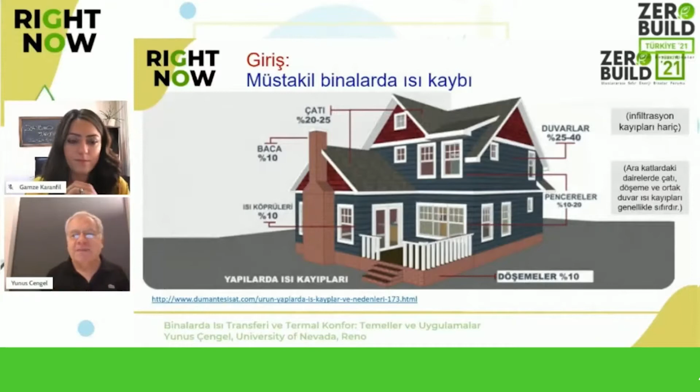There is loss of heat, and here there is no... We are trying to come up with awareness raising. There are the heat losses, for example, 10% of this. And if it is condensate, it is 99% efficient.

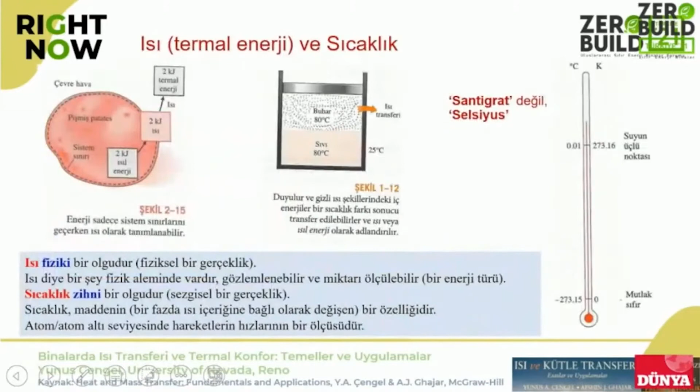And thermodynamics is a discipline itself. What is the essence of it? While you work on it, the net change in its total energy is the difference between the input and the output of energy. So the total energy that enters into the system, and we get the difference when we deduct it from the total input. This is so simple. So the energy that enters and the energy that we have as an output, and then we get the difference.

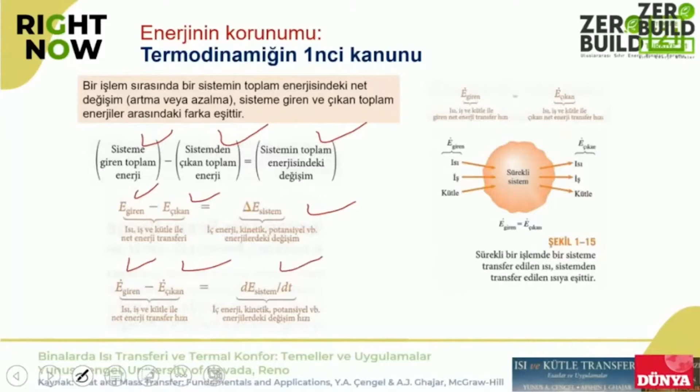So if we want to have it rapid, we use the units version, and then we call it the input and the output. It might be in the form of energy or with the mass, and then it is equal to the energy within the system, and we can see it in the scheme. Energy, of course, the simple way is thermal energy. We have energy within the building or within air; if it is too much, we feel hot. If it is enough, we feel comfortable. And there is also this energy with

some sensible energy or some latent energy. When there is this chemical reaction, there is no change in the structure of atoms. For example, there is carbon or hydrogen, and while it burns, nothing happens to atoms. For example, if something happens to an atom, and it turns, for example, into helium, then we call it nuclear energy. So usually, this is not our topic for today.

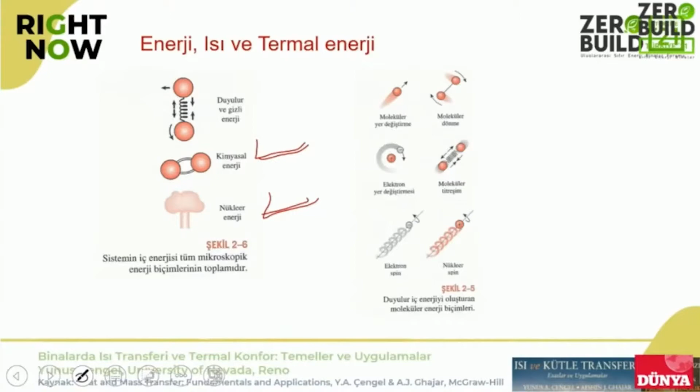The issue that we will talk about is thermal energy or heat. It's mainly about the movement of atoms or molecules. So it is the reflection of the movement. So we see an increase in heat when there's an increase in their movement. Another important point is efficiency. We want to achieve something, and then we do something in this respect. It is the productivity that we are dealing with.

For example, we want to cook pasta. That means we need to boil water. Of course, it will not boil by itself at the temperature of the kitchen. That means we need to burn something, or transform electricity into heat so that it will enter into the water and then it boils. For example, we have a heater device with 5 kilowatts, and then 3 kilowatts enter into the water and 2 kilowatts go to the kitchen. That means the efficiency is 60%. This is the efficiency.

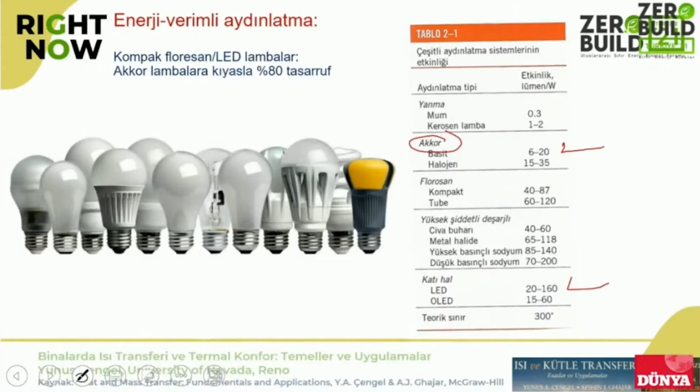We call it energy efficiency lighting. And comparing to incandescent, we can save up to 80%. So rather than paying 100, you can pay only 20 Turkish lira.

Also, let's talk about the cost efficiency. Rather than the energy amounts, if you pay attention to the amount of money that you are spending, it is economy. In fact, they are quite equal to each other.

So people usually ask which type of heating source is more efficient. I have a publication on this issue that was published 2 years ago, and I compared natural gas and also LPG. 2 years ago, 1 unit of natural gas was 1.8 TL and LPG was 108 TL, but their units were not the same. And you see their value, and what we see is 50% efficiency. That means 50% is lost.

If it is electricity, it is up to 75, but if it is induction electricity, then it is 90%. So the money spent for heating, it is 44, and LPG, it is 151. If it's electricity, it is 98, and if it is induction, then it is 90. It's 81.

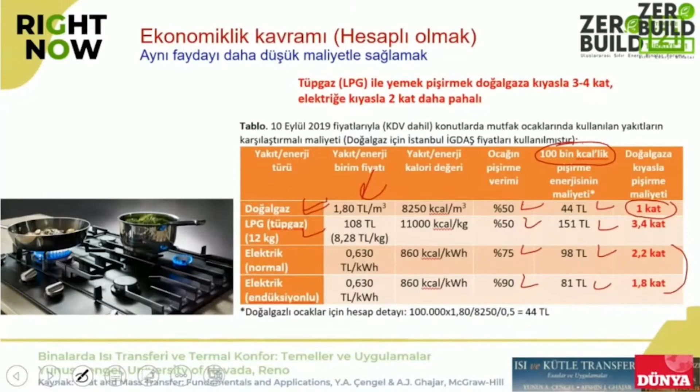So, of course, it changes according to the price, but if you have natural gas, for example, it is useful and helpful to use it. And if you use electricity, then you pay twice. Comparing natural gas and LPG, if you use a stove with induction, then you save money. So it is about economy, and you can calculate this issue easily. Sometimes simple calculation is extremely important.

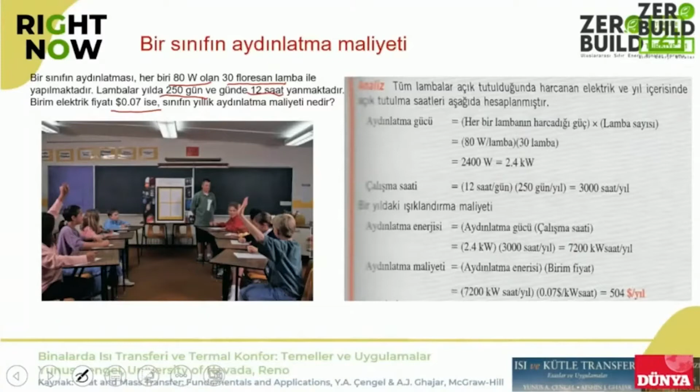For example, lighting cost. You don't need to be an engineer. You can make the calculation. It's a simple example. If in an example there are 30 bulbs and these are 80 watts, and all these lamps are fluorescent, then you can easily calculate. There are 30 and they are all 80 watts. That means when we multiply them, it is 2,400 watts. That means 2.4 kilowatts.

And given the fact that we use them for 250 days, you can simplify it, and it is 3,000 hours per year. And when we multiply 2.4 kilowatts by 3,000, then it is 7,200 kilowatt hours. It is important because we use kilowatt hour as our energy unit. When we multiply it, we get this kilowatt hour.

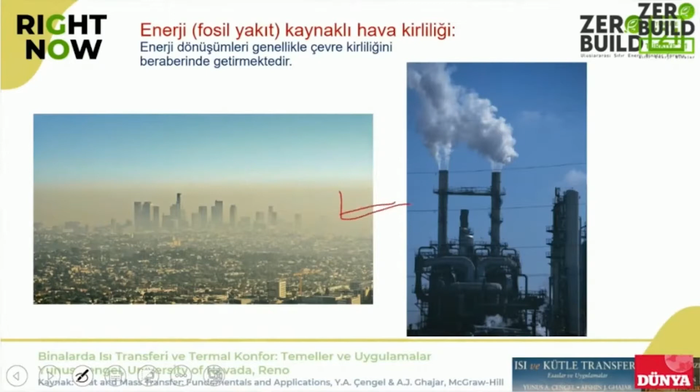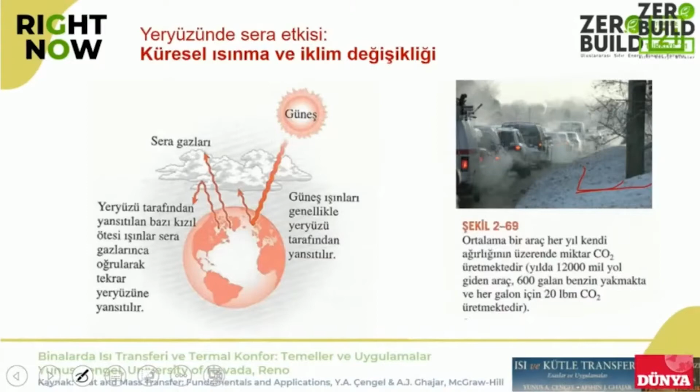As we see in this photograph, our lungs are exposed to pollution, and it is not good for our health or our economy, our budget. And it is CO2, greenhouse gases, and they form a cloud which creates a greenhouse effect. And here's interesting info: a car generates CO2 which is much more than the weight of the car itself.

Another issue is this, as you all know, specific heat, the required amount of energy to increase 1 Celsius degree. For example, if we want to cool down a Coke, what we need is the change in its energy, we just multiply it, and then we achieve this. So it is about the energy transfer from the Coke.

We need to remove this energy from the Coke, and the energy balance here for this energy transfer is the energy that enters and the energy that leaves, and then the difference. And there is no energy generation in this case, such as lighting, electric heating, or energy production. What we have here is the change in its thermal energy.

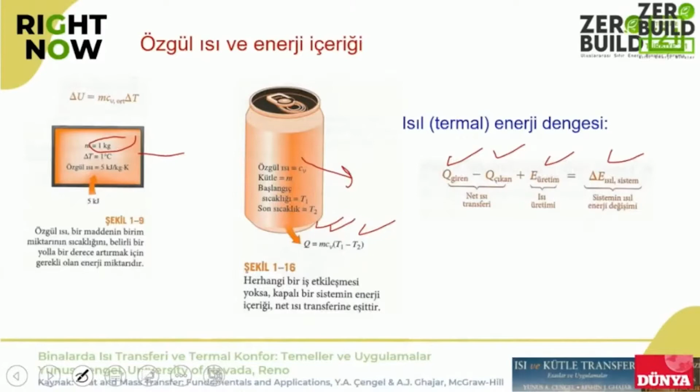This is the main formulation that we have, and this is the main equation that we have here.

As regards to the surface energy, as you know, the surface does not store energy. So the surface energy needs to be equal: the energy that enters and the energy that leaves must be equal. So let's look at a wall.

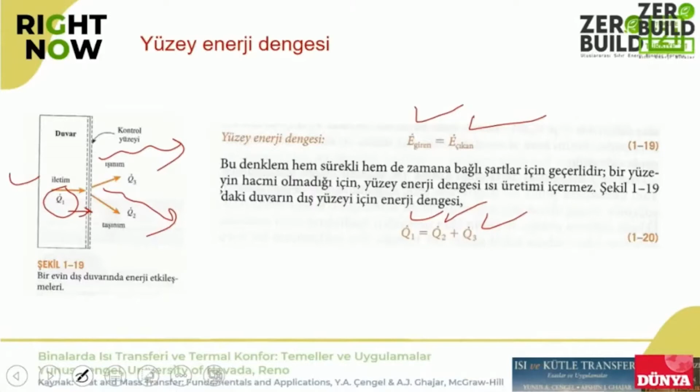For example, it is the exterior wall, let's say, and we lose energy, and then we have this Q1. We will receive it and lose it later, and then there will be 2 mechanisms. And then we see how it moves, because air carries this heat. So Q1 equals Q2 plus Q3. That is radiation. This is the energy balance that we are using.

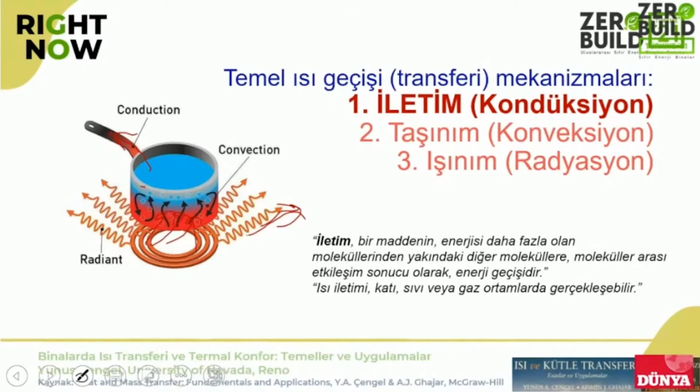In this image, as you see, the red part is radiation, even though there is no connection, there is no touch. If there is touch, then it becomes conduction. And if there is flame, since it includes air movement, then it's convection. As for conduction, if you touch this part of the plate, then you will feel this part, because sometimes they are parallel, sometimes one transforms into another.

This is the second law of thermodynamics, that is, heat moves to the part that is colder. So if the coffee is 70 and the air is 20, if you leave it, heat leaves the coffee and moves to the air. That means there is energy loss, because 70 Celsius will reach 20. We never say that it's 20 Celsius and expect the coffee will be 80. No, that is not the rule. That is the main rule.

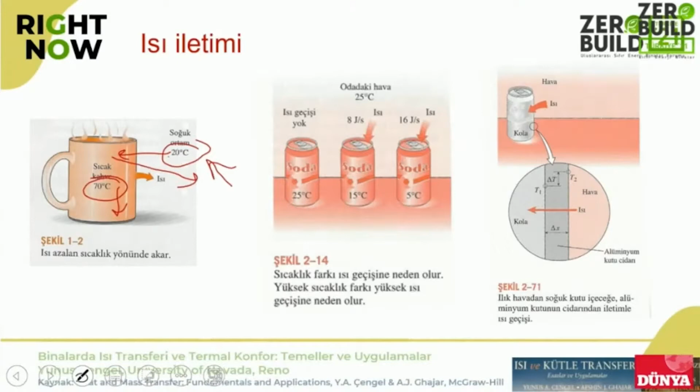The second issue is the temperature difference and heat conductivity. Let's say the temperature within the room is 25, and a Coke is 25, then there is no difference, so there is no conduction. In order to have this, there is need for a difference. If the difference is 10, then let's say it is 8 joules per second.

Then if the difference is higher, the heat transfers in a faster way, like 16 joules per second. So the key concept is the temperature difference; it is the driving force of heat transfer, and a higher difference means higher transfer.

As regards to the main heat equation, it might be a wall or a drink, as I said, and it might be 0.5 centimeter thickness. Let's say it's a wall: the interior temperature is T1 and T2 is the exterior, and there is heat loss. Let's say the surface is A and the thickness is delta X. It might be a wall, roof, windows, a flat surface or a curve, and the principle is the same.

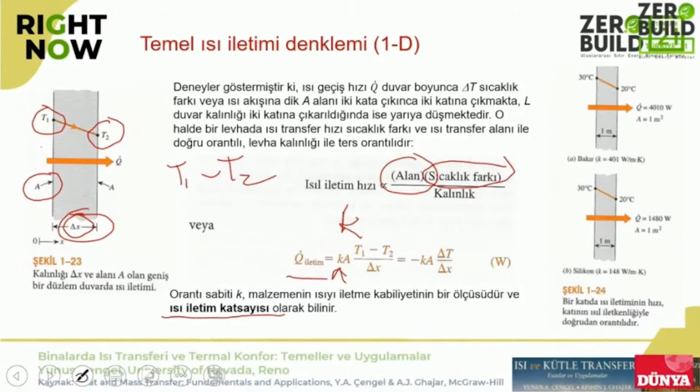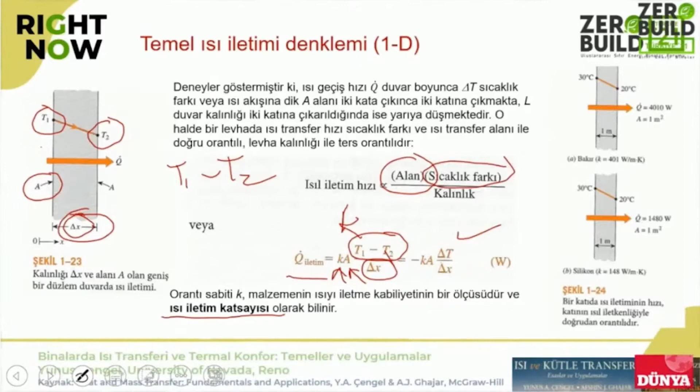For the heat transfer, we multiply the conductivity by the surface area and by the temperature difference, and then we divide by the thickness. In order to have the same direction, we can use a minus sign, but these are not important details. This is the conduction.

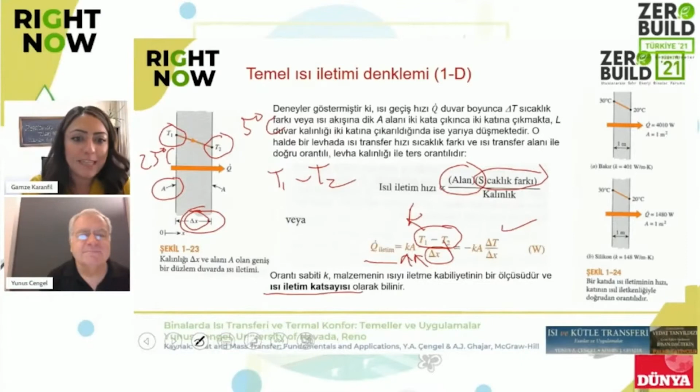So we are talking about, you said there is this inverse proportion as regards to the thickness of the wall, and you said direct proportion with all other values. I think this equation indicates the importance of this issue. Let's say it is insulation. Let's consider it is an insulation plate, and we want to reduce the heat transfer. What we need to do, it is quite clear.

The thickness of the insulation is important. If you make it double, then the heat transfer will be reduced to half. So the insulation is important, it will reduce the amount of the heat transfer. For example, if it's an insulation, that will be a wall or some other elements that we will pay attention to and that we will take into consideration.

But the thickness of the insulation is important to prevent heat loss, or if it is summer, then it is the heat gain. For example, in the summertime, if you are using an air conditioning for cooling purposes, and if the weather is hot outside, then it will prevent the energy entry, the heat entry. So the thicker, the better.

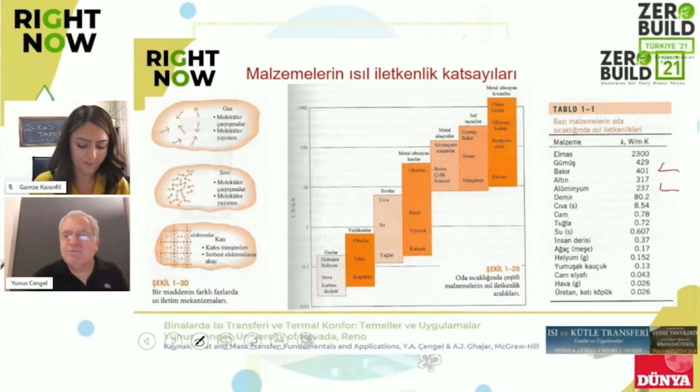And air, it's 0.026. That means air is the best insulation material. And we have this solid foam, then we have all these best parts. For example, when we have a jacket with different layers, or the furs. All these are important and ideal insulation materials. So it prevents heat transfer and the heat loss.

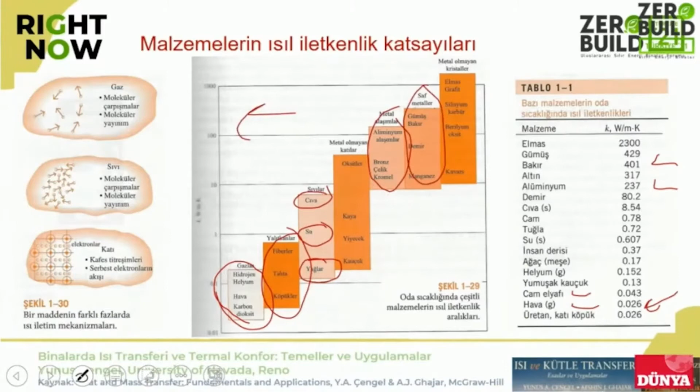As you see from the table, the transmittability is very important. It might be foam, the wood, or fiber. And we have metal. So why do we use oil for our cooking, not water? Because water boils much easier and shorter than oil. Let's look at metals. We see their transmissibility is important.

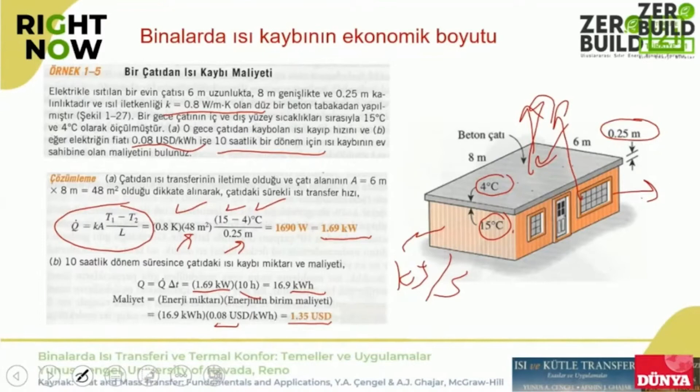So from that roof, there is 0.25 meters of insulation. So we can say that there is 10 to 15 Turkish lira. In order to have this, the insulation should be made. You have to be very diligent about this, but the calculations are very easy. When there is multi-layer, you have to handle it in a systematic way. If there is a wall, what should be the insulation? If there is convection here, or conduction, or other things.

So we are developing the concept; for conduction, we already discussed this expression. And as is the case in electricity, there is a voltage difference, right? And it is V1 and V2.

And there is also resistance of electricity. We get the proportion of this, and we get the current, the electricity current. In the heat, we want to do something similar. And instead of electricity, we see the conductivity, and the temperature difference is the driving force, and there is the heat resistance. So we say T1 minus T2 divided by the resistance.

So we can say that the resistance will be thickness divided by the conductivity multiplied by the surface area. So if we have this kA here, we have the resistance, and we get this result. And also for convection and conduction, the heat transfer will be the temperature difference, let's say internal and external, divided by the total resistance, as is the case in electric circuits. So we can solve the problems very easily like that.

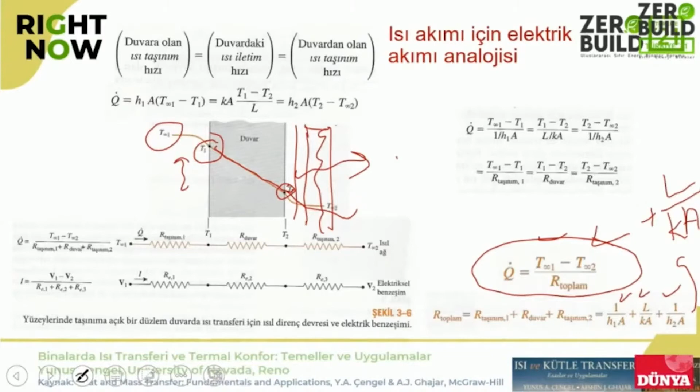So for example, in our building, let's say we want to have 5 centimeters of insulation. How much less will the heat transfer be? So we can say that there are three things, and we will add the thickness of the insulation and the conductivity, and the surface area is the same, and this is how the heat transfer is obtained.

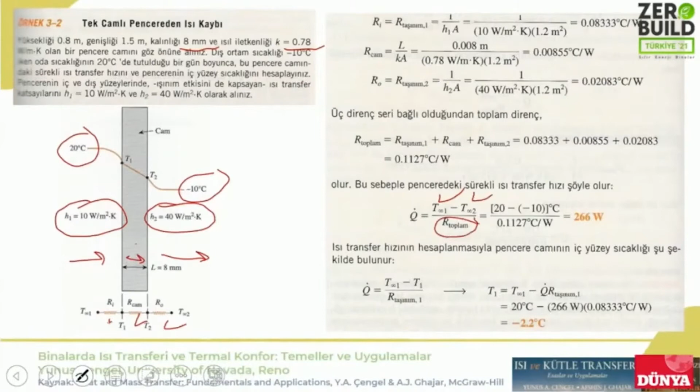For example, there's a single glazed window, and the thickness is 8 millimeters. The conductivity is 0.78, and the ambient air is 20 degrees. With a single glazed window, we will talk about the heat transfer. As it is a single glazed window, there is convection here, and also conduction, and also convection and the radiation coefficients. There are three resistances there. We look at ambient air and outer air, divided by the resistance. This ratio will give me the heat transfer.

We can say that the height of the window is 0.8 and the width is 1.5 meters. We will use these expressions for conduction and for convection. We can add these, and there is the total resistance, and we make this calculation, and there is 266 watts. So from this window, there's a heat loss of 266 joules every second.

If we take this into account, we can calculate T1. What is T1? It is minus 2.2. What does that mean? Here there's a single glaze, and minus 10 Celsius is the outer temperature, so of course there will be the formation of a layer of ice.

There are some questions from YouTube, so we can answer the questions. Figen R asks: there is the insulation material and the wall, with a 5 centimeter gap. I liked it, however the master said that it is not very good. What do you think of this? There's the gap between the insulation layer and the wall. Air is the best insulation material, as I have pointed out. It is very good that there's an air gap. I will show you the next example, then I will answer that question, because it is quite related to the subject.

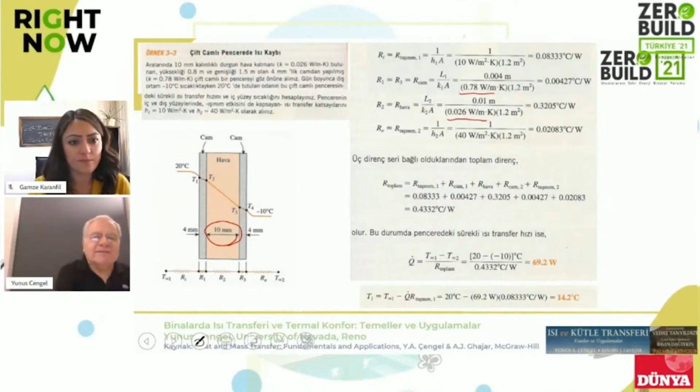So we can say that there is 1 centimeter of insulation between 2 panes, because the conductivity of air is very low. We can see that it is 0.026. However, for the glass, it is 0.78. You can see the difference. If we have double glazing, what would the heat transfer be?

It was 266. There is the resistance of the glaze and also the resistance of the air, and with simple calculations, this is the new resistance.

However, there is 20 centigrade and minus 10 centigrade. What was it? It was 266 watts. So there is a 1 centimeter air gap, and it decreased from 266 to 69 watts.

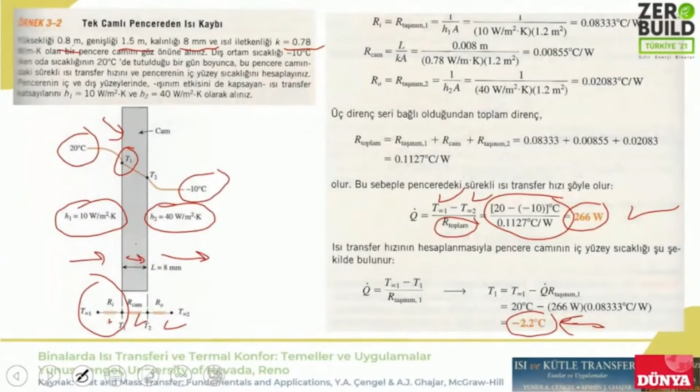So what is double glaze? There are two glasses, and in between there is air, and this is the same with the wall as well. When it is a few centimeters, you can use this one exactly. So there could be small conduction, but it is not very effective, the conduction approach is very valid here.

So in the market, there are a lot of people who think they know the best, but you have to know the fundamentals. This is the objective of this lecture, to give the fundamentals and look at the questions accordingly.

I guess I answered this question with the example of double glaze. There is one more question about insulation. It is related to conduction.

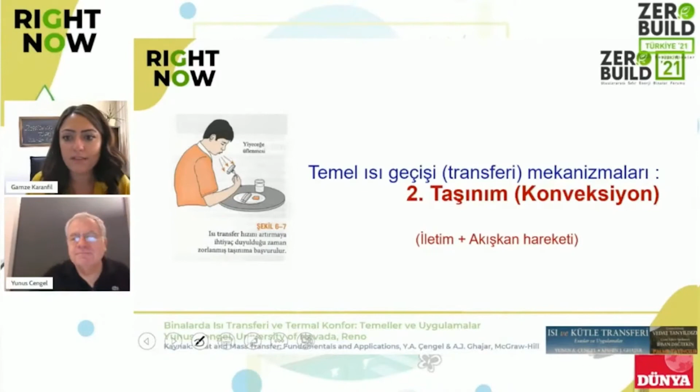So from the internal and external surfaces, instead of insulating 20 centimeters externally, if there is 10 centimeters from internally, will that create a difference? There will not be any difference.

At the end of the day, you look at the fundamentals. For example, this is the insulation and this is a resistance. The resistance can be here or there and the calculation does not change. So if we look at all the resistances, their place is not important.

In normal life, we prefer external wall insulation. Why? Because when you put it into internal wall, let's say you are going to have a plate or a screw, this will not be there. However, if there is cement or mortar there, it will be important.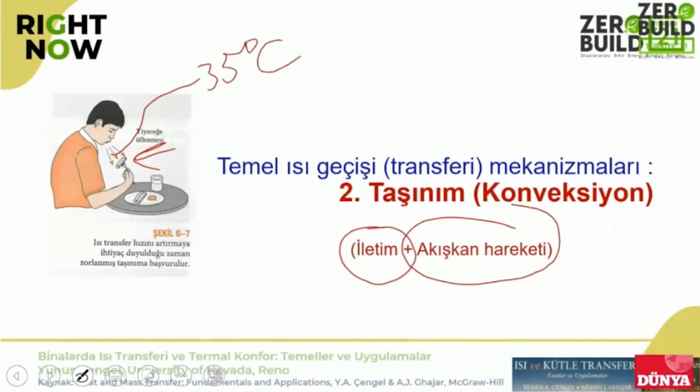So in terms of convection efficiency - for example, you're eating something very hot, you just blow it to cool it down. We can say it is 35 or 37 degrees Celsius, and ambient air is 25 degrees, so the difference is very high.

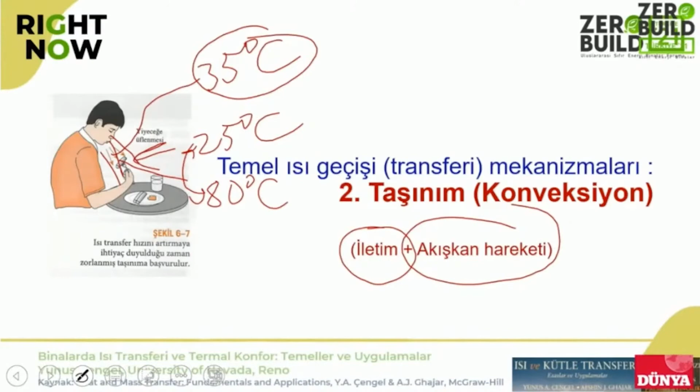So you could just leave it in the room and it can cool down, but we blow it, because when we blow it, there is air movement, and the air movement increases heat transfer. Even if the temperature is higher, you just cool it down more efficiently in a shorter period of time. This is very important - the more movement, the more transfer and convection.

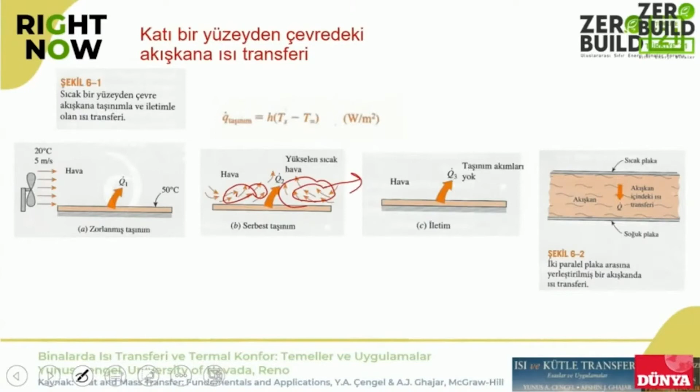Therefore we use fans for that - why? In order to have air movement. Normally, let's say there's a hot surface, and with that, the air will increase and expand. The air will expand, and what will be the density of the air? It will decrease.

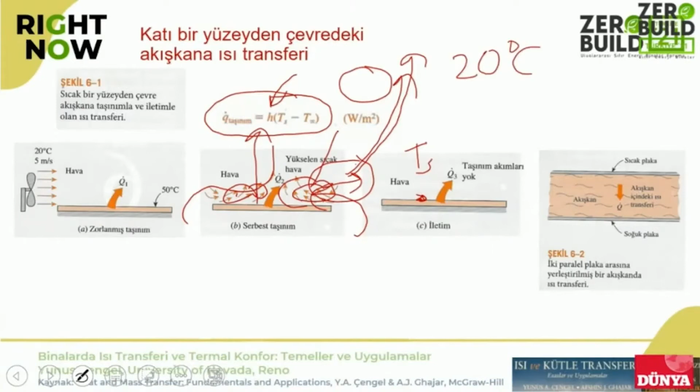This is a very complex, complicated issue, so what we do is express it in a way. This is the convection heat transfer coefficient multiplied by the temperature difference. This is the surface temperature, and we say T surface, and of course this means infinity. Mathematics is not infinite, and it is away from the surface, let's say 20 Celsius degrees. So we look at this, and this time we look at the proportion coefficient.

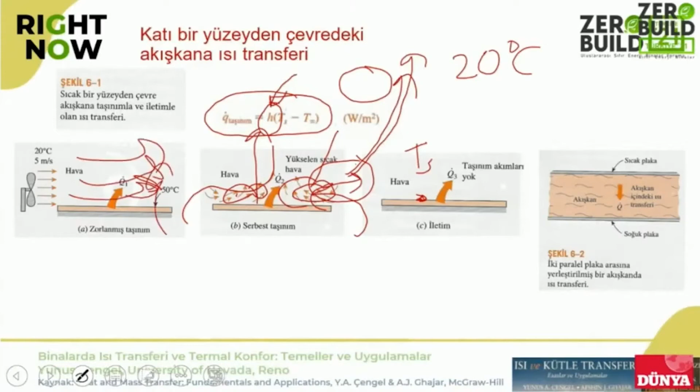And if the cooling is not enough, we use fans, because it increases that air movement, and the cooling is even more. It's like you blow to the meal. For example, when you look at this, we don't see the air movement, but if you look at this with a camera showing the intensities, you will see these movements. The air movement can be seen very easily. So this is the natural convection, or the free convection.

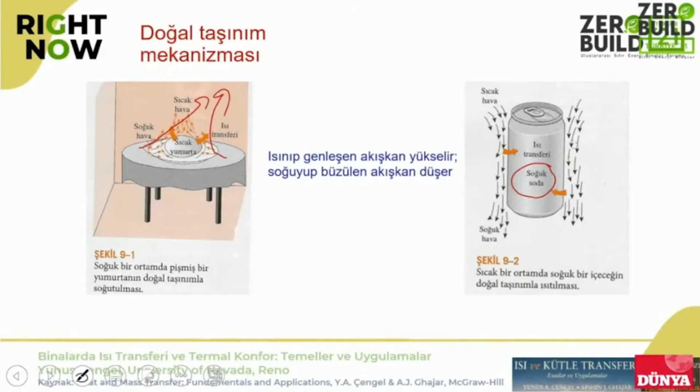The natural convection is not only about air getting high, the air can get low as well. Let's say there is a cold Coke, cola, the air will get cooler, and there's air movement, so there will be a hot air in replacement of this. If the cold air goes and the hot air comes, we can say that the gain is higher. That is the convection.

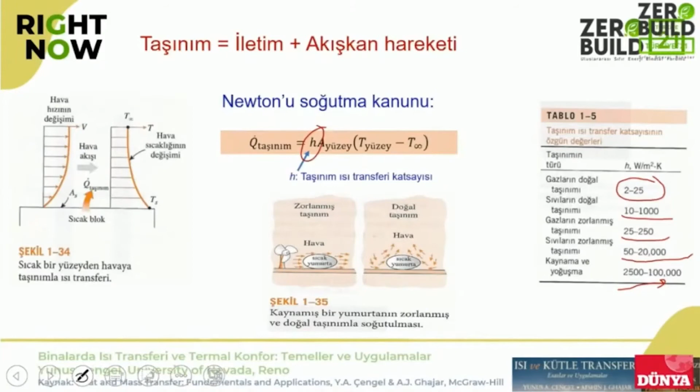As I pointed out, when we say H, H is the convection transfer coefficient. For the gases, it is 2 to 25; for a fluid, 10 to 1000; and for gases with forced convection, 25 to 250, increasing to 20,000. And if there is boiling, it increases up to 100,000. So there's a phase change. Even if there is a very low change, if there's a phase change, the heat transfer will be very high in the unit time.

Therefore, we use fans in the summer. Does it cool the air? No, so why do we use them? If it does not cool the air, it's because of this: our body temperature is set, the ambient air is set, and the surface is set as well. However, this is the heat transfer coefficient. When the coefficient increases up to 2, we can double the heat loss, and this makes us feel better. So the heat transfer increases.

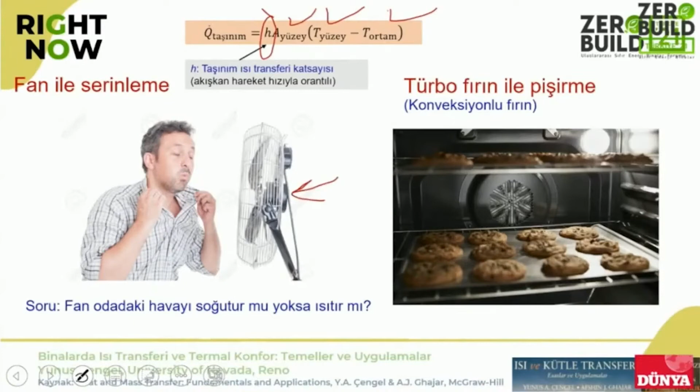And the same is used in ovens. When we look at furnaces and ovens, we can see the convection and transfer to the meals is very fast. This shows the property and characteristic of convection, whether the fan increases, cools, or makes the air hot. What does the fan do? It takes electrical energy, turns it into movement, and with the movement, it actually makes the air move, and then it turns into heat.

So if you're cooling with a fan, you have to open one or two windows. This is the same with the refrigerator. If it is in a closed environment, sometimes they put the refrigerators within timbers, I see that in hotels, and the refrigerator will not make cooling there. It will work with very low efficiency, because the refrigerator actually increases the heat in there.

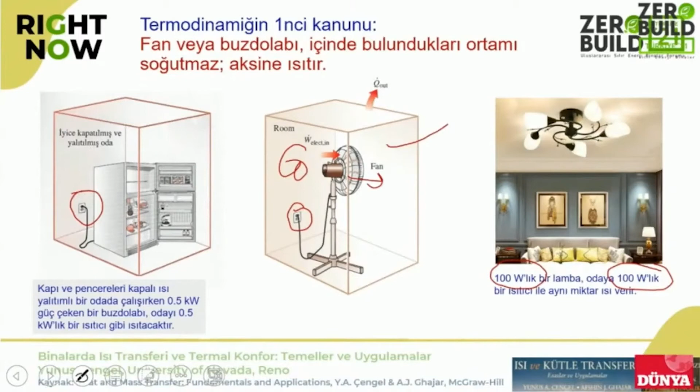For example, the bulbs, light bulbs: if there is a 100 watt bulb, it will give 100 watts of heat. Of course, in the winter, you have to give us such an amount of heat. For example, here there is a 200 watt fan, and here we can say to what extent it will increase the ambient air temperature.

Of course, that will be an imbalance, and when you use energy conservation in a steady manner, the imported and exported energy, when they are equal to each other with this equation, you can say that the 25 degrees Celsius air, when it is 26 degrees, that will be there, and you can make it with these factors.

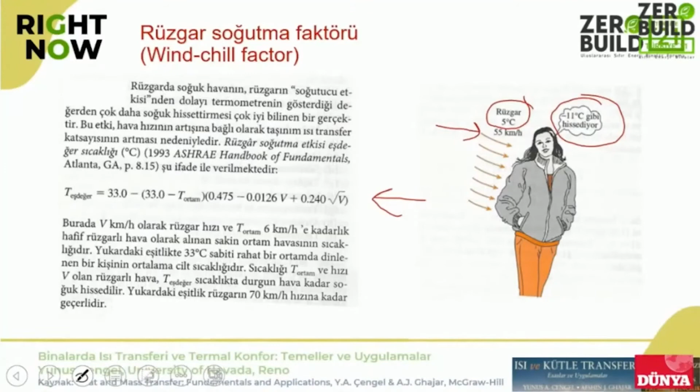There's also the wind chill factor. For example, outside in the winter, when there's a wind blowing, you get shivering, you can feel that wind. However, let's say if it is 5 degrees, and if there's a very strong wind, we feel it like minus 11 Celsius degrees. This is an ASHRAE formula; we see the speed, and the felt temperature can be calculated.

If there are questions, I can answer the questions. If not, we will continue with the third mechanism, which is radiation.

We have a question. As we are in the zero build forum, the buildings are more related to insulation. Uğur Ceylan asked: in some certain buildings, they use coating with stainless steel, and they put isoglass there. Would that increase the insulation?

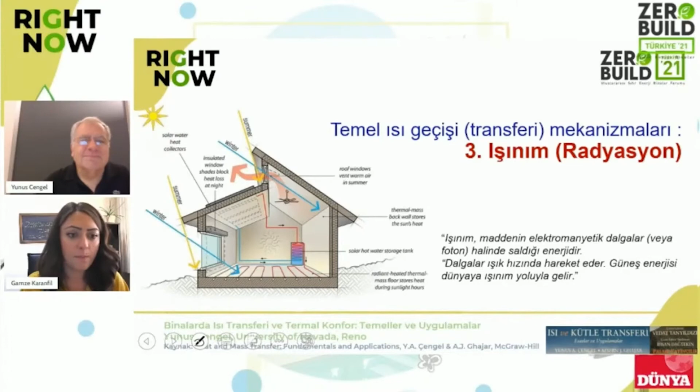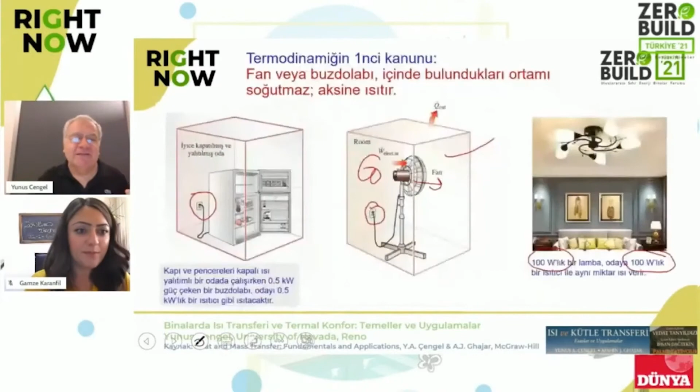That's a good question. Actually, when you look at the fundamentals again, you can find answers right here. For example, let's look at the glass here. There are some resistances. Let's say this is the wall instead of air, and let's put here a metal.

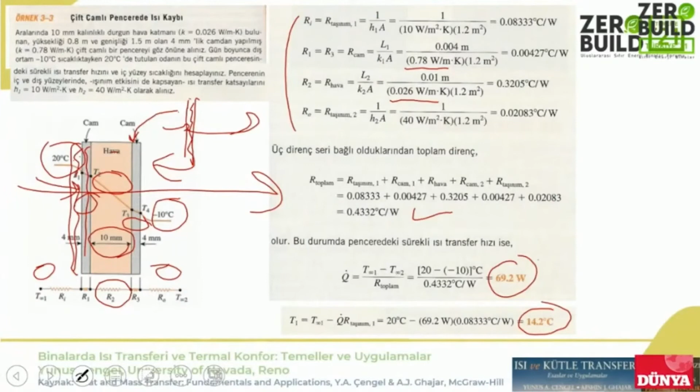Could be a copper metal, very conductive, 1-2 millimeters thick. The copper is very, very conductive. So it looks like it is very conductive, and there's a new layer of resistance. What is the resistance amount? This is the thickness of this copper layer divided by the same surface area, and also the conductivity of the copper.

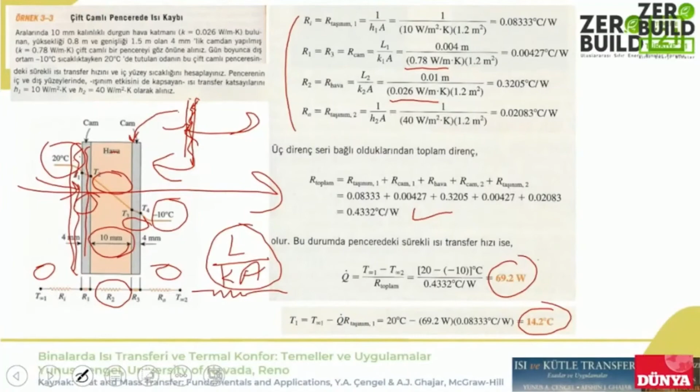So we'll continue with radiation. We see radiation here with the X-rays, we just look at the X-rays. However, radiation is the electromagnetic wave. I use it with the same term, and the thermal radiation is called radiation, and the radiation is responsible for heating our houses in zero buildings.

You will see such applications. So there's maximum use of the sun, for example, even that part, and the size of it is very important. And if it is long, you can see that the blue beams do not come inside, and it protects you from the sun in summer, and in winter the sun's rays come in.

So in architecture, even these details with the right calculations make a difference. Here you see actually benefit from the solar energy in a passive way, and also get protected from its harmful effects in summer. And here there is this roof window. You can get direct sunlight, and this one protects you from sunlight during summer.

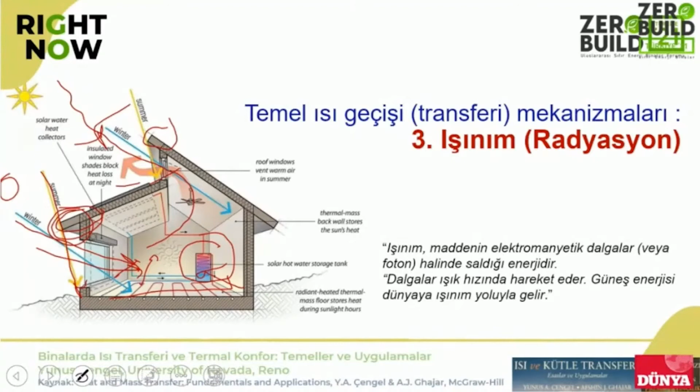By opening this window, you are able to enable the warmed up air to leave, and by placing solar panels, we are able to store that energy in storage and then use it for other heating purposes. By using low heat energy, thanks to the radiation energy, you're able to get warmed in a more comfortable and gradual way. So this is actually a use of thermal radiation in homes.

However, a general evaluation would let us see that radiation is everywhere. Actually, we give thermal energy through radiation in our bodies, almost 1/3 of the energy in our bodies. So this radiation does not just originate from the sun. Even the ice uses energy through radiation - furniture, walls, plants, seats - and what is the net energy? Their difference.

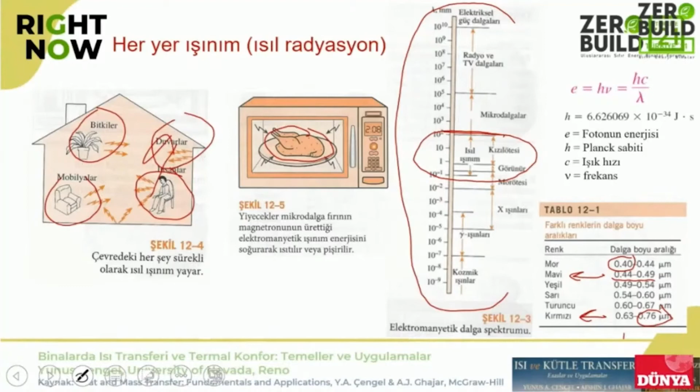If it is 1 micron, for example, we do not perceive it at all. Our eye is not sensitive to that. Other creatures might see actually the infrared, but we don't see that, and we don't call it light.

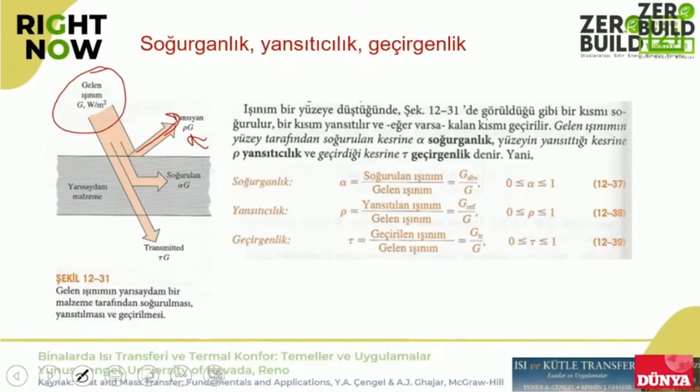And in this case, we use light by taking ourselves as a reference. And here there are different terminology. When a light comes from sun or another source, we refer to absorptivity. Here, this actually shows you the coefficient of reflectance. If we're talking about a glass component, then it's absorbed, and that is represented by alpha. And some other are conducted, and that's called tau G.

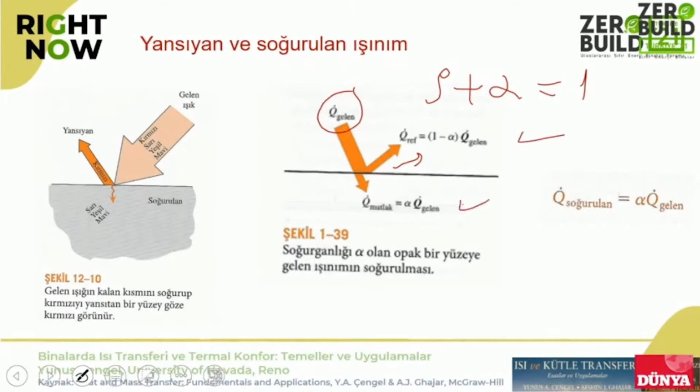So here, actually, you see a calculation based on absorptivity and other factors, referring to energy conservation. You see that if there is this opaque surface, reflection coefficient plus absorption would be equal to 1. So here, alpha times Q incoming means the absorbed amount.

What is the greenhouse then? There is the greenhouse effect then. Here you see a glass. According to the wavelength, we look at the transmissibility, or conductivity, of the glass. 0.3 to 0.7 is actually the visible light. And when you look at the conductivity of the glass, you see it's around 0.9. I mean, it depends on the thickness, but it conducts 90% of the incoming light.

Here you see the infrared part. Starting with 3, the permeability or conductivity decreases radically as this light is absorbed. It doesn't let it permeate. So an incoming light, originating from sun, between, for example, 0.3 and 1, goes through it. If it is more than 1, then actually it is absorbed. So glass is not a conductive material for infrared wavelengths, and we use it in greenhouses.

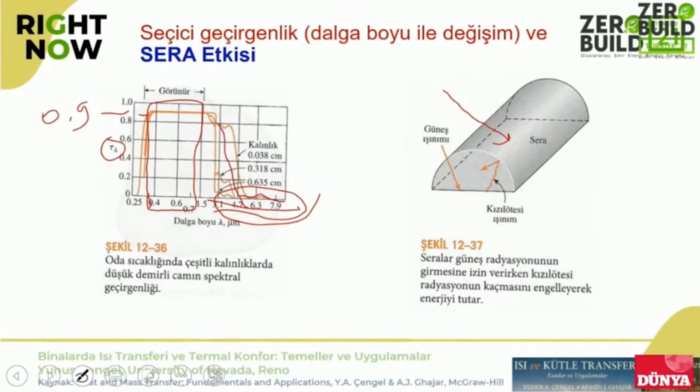Light goes through the greenhouse. It might be plastic or glass. However, the heated plants and other substances, their warmth, let's say, is around 300 Kelvin. They're also giving radiation, but this radiation has a long wavelength. So what happens? It goes up, but it cannot actually permeate. It gets absorbed and comes back with a blanket effect. That's what is called the greenhouse effect. So you are able to achieve high heat.

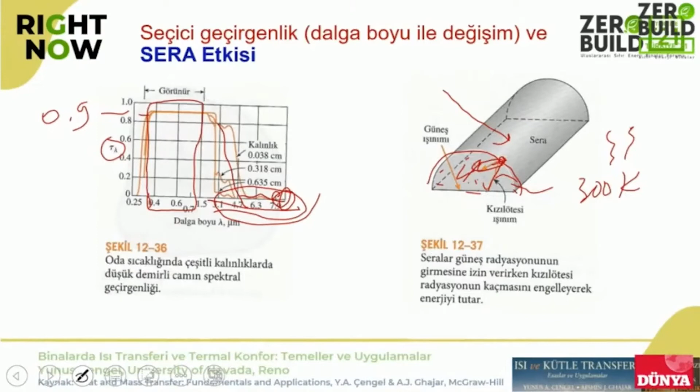What happens when you leave your car outside in the sun? It's like hell when you open the door of your car. Very hot indeed. Even if it is 25 degrees outside, it feels 35, 40, and even higher inside. What is the situation in the world with carbon dioxide and other emissions? Those wavelengths are actually insulated, and the Earth is prevented from getting colder.

Here, absorptivity also changes depending on the wavelength, and it leads to misunderstandings. For example, let's call this a cement surface, be it painted or not. The radiation coming from other buildings or clouds is absorbed at 90% because it has a long wavelength, around 3 to 5 micron. But for sun, it is generally short wavelength, and the absorptivity is 0.6 in cement.

But if you don't want to absorb the sunlight, then you can paint it white so that it gets reflected. So you can decrease this amount to a huge extent. So paint can be used to prevent such absorption. If you want to reflect it, you can use aluminum, with good properties for short and long wavelength. That's why aluminum foil can be used to fight against radiation. If you don't want chicken to be cooked too much in some parts, then you should cover it with foil.

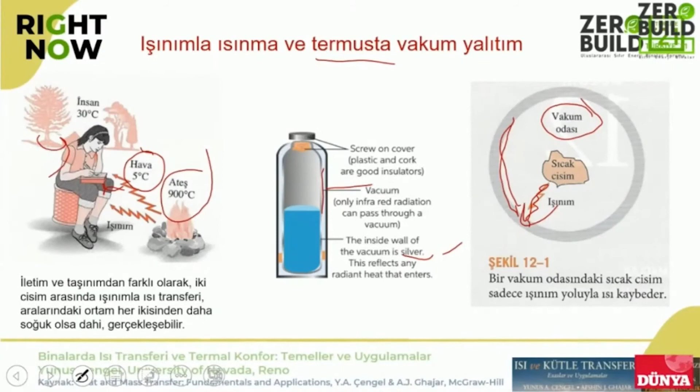If it's 5 degrees Celsius outside, if you're close enough to the fire, which is, let's say, around 1000 degrees, you get warmed very well. But you also need to turn your back, as it will not get that heat. How do we calculate it though?

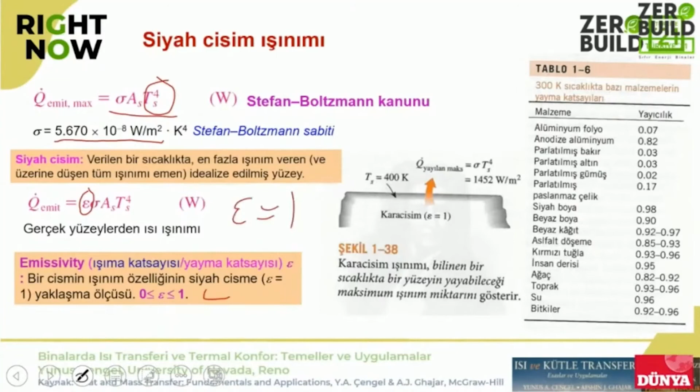The radiation emitted actually is calculated as such. This is the fourth power of temperature. And here the Stefan-Boltzmann constant is used to reach the ideal radiation. This emissivity, or the coefficient of radiation, is somewhere between 0 and 1. And that's how a normal body behaves with the radiation level, radiation coefficient. If it emits and receives radiation, we should actually

take this element of the equation outside. This is the surface area and Stefan-Boltzmann constant, and this is the epsilon radiation coefficient, and then you see T to the fourth. So actually it's an easy calculation. And here you generally see this element on the tables, and it's not difficult to find that coefficient.

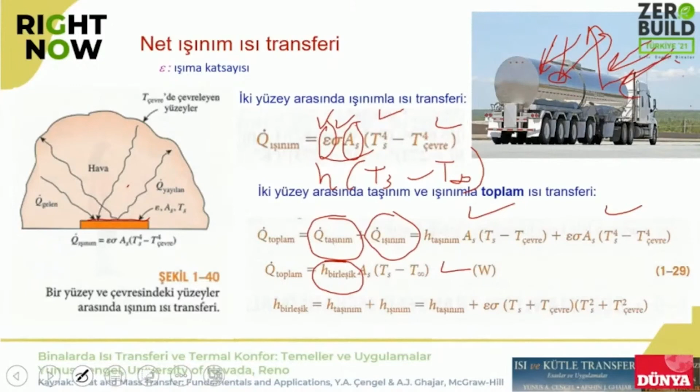Milk tank containers have these bright surfaces. They have polyurethane insulation on the inside, but when you place this, all the sunlight is reflected back, and the radiation coming from the clouds and such is also reflected. So it's very effective. Otherwise, you wouldn't have a bright surface. If you paint it white, it would reflect the sunlight, but not the radiation coming from outside. And that would not preserve milk significantly.

What about the effect of radiation on comfort? We generally check the room temperature. Let's say the room temperature is this much, for example 22 or whatever, but the surface temperatures also impact our comfort. A human body has, let's say, an average surface temperature of 30 degrees. You may ask why not 37? Because that's the inside temperature of the human body. It should be 30, 31, 32, 33. Otherwise, we cannot emit heat.

And here you see the temperature of the walls. Let's say it's 10 in winter and 25 in summer. With radiation, this person actually transfers heat. We place the formula elements here. When the walls have 10 degrees, the person loses 152. When the walls have 25 degrees Celsius, that value comes down to 40.9. So this thermal radiation has an impact on comfort.

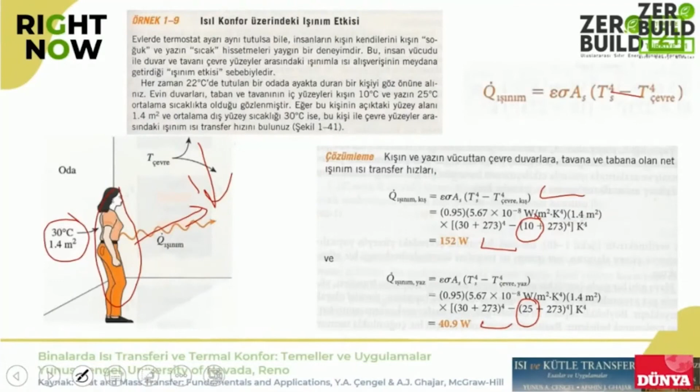That's why, as in the example of double glazing, it actually has an impact. The degree difference increased from 2 to 14, as you remember. That also applies to walls, and that provides thermal comfort. I mean, you check the boiler, it's 24, 25 degrees. You say, I should not feel cold in winter, but there's this wall impact.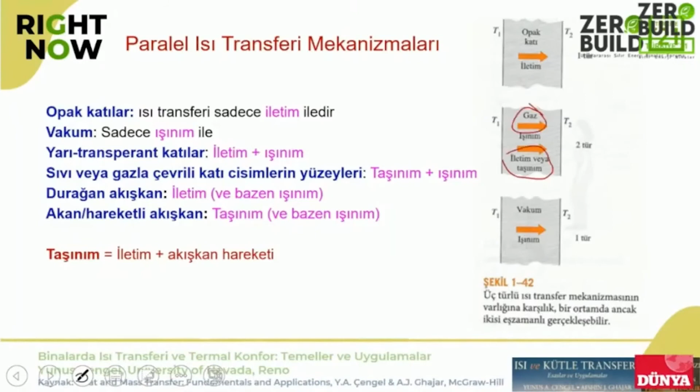As for parallel heat transfer mechanisms, in solids there's just conduction, in gases there's radiation, and here it can be conduction and convection. Or if there's vacuum, then there is only radiation. We should also keep them in mind.

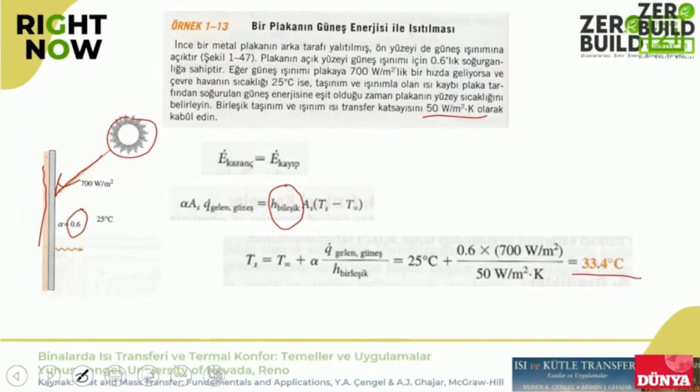And here, when you have a special plate with insulation behind and receive sunlight, let's say the heat transfer coefficient is 50 watts per square meter Kelvin, and the sun reaches with a value of 700 watts per square meter. Here the sun is absorbed at a value of 0.6, and there is this combined heat transfer coefficient. And when the environment is 25, there is a balance when the plate reaches 33.4, with the heat gained equal to the heat lost.

That's why the color of the external facades of buildings matters a lot. Let's say the absorptivity is 0.9, so 90% of the 100 watts per square meter is absorbed. But the absorption will be only 0.45 with a light colored wall. I mean, in winter high absorptivity is good, but in Antalya, lesser absorption is better. So we can actually play with colors and check them.

The majority of things depend on temperature measurements. If you are open to environmental surfaces, and if there is a temperature difference between them and the fluid temperature, then you will encounter errors. So here there should be an equality between the loss and gain. When we equalize them with the conservation of energy, here you see the radiation effect.

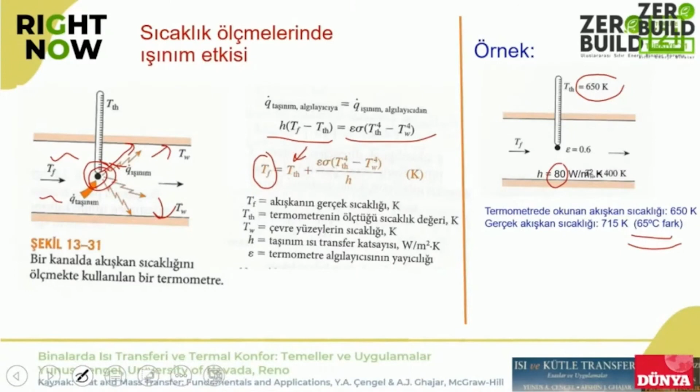That's for an example. When H is 80, let's say it reads like 650 Kelvin, and the walls have a value of 400 Kelvin, then the radiation impact creates a 65 degree difference. That's why sensors are sometimes kept under protection to preserve them from the environment.

What is another method? Infiltration. Regardless of how protected your house is, air actually permeates. Let's say it's -10 in winter, and you have 22 degrees inside the home. What does that mean? In windy air, especially, that air will get inside, and it should, of course, leave the house somewhere. But actually, it goes outside the home at 22 degrees. So it enters the house at -10, and leaves the house at 22.

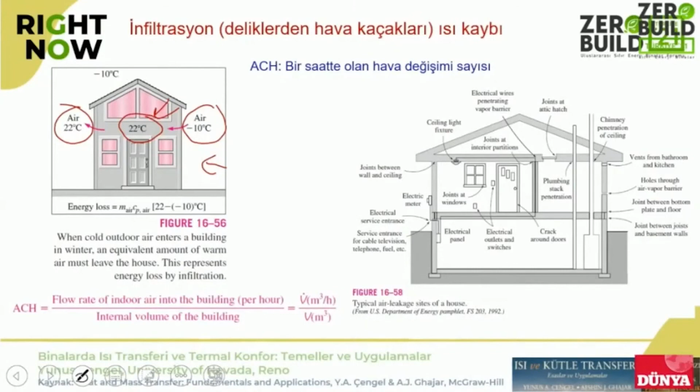How will we compensate it? Through the heater. That's why this should be smaller with the window openings, wall openings, and other areas. Actually, sometimes they make the biggest impact. You may have a very well insulated wall or roof, but if your doors and windows are not that good, then that warm or heated air leaks through your house.

As for the thermal comfort, I will make this last remark and finish my presentation. The human body is like a machine indeed, continuously producing heat. What is our normal temperature? 37. And generally, the temperature outside is lower than that. If we continuously produce heat and cannot emit it to outside, then we will die. I mean, if it goes all the way to 38, 39, 40, 42, our body will not be able to endure it. We will feel at least unwell.

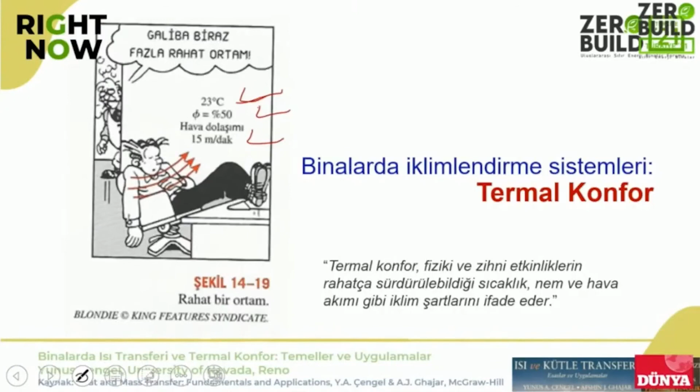That's why we should be able to comfortably emit it to outside with normal clothes if you're not covered with blankets and such. So what is the normal value? 23 degrees, 50% humidity, air circulation of 15 meters per minute. Under these circumstances, the majority of people feel well, and this is called thermal comfort. What does thermal comfort depend on? Most importantly, the heat, then humidity and air speed, clothing insulation, and our metabolic rate.

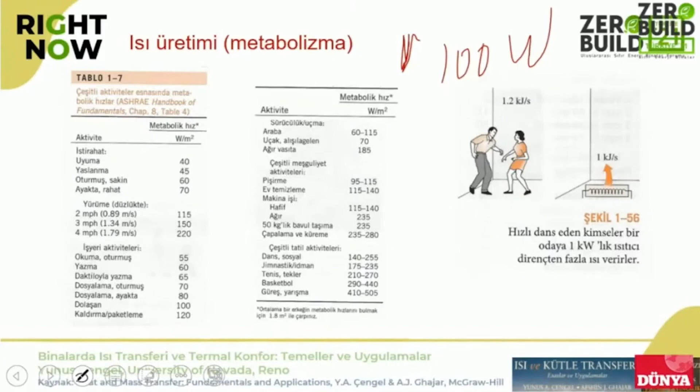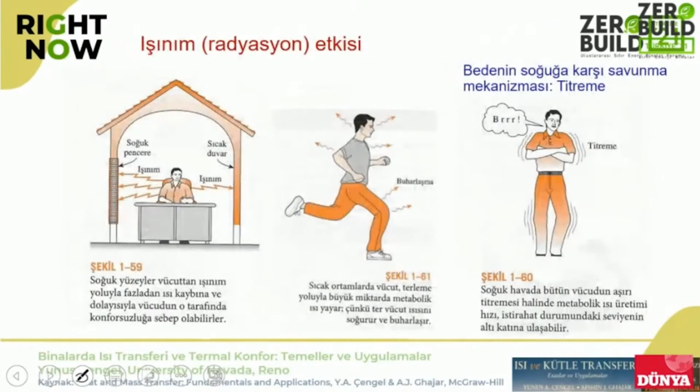For example, you do exercise, you use machines, or you do wrestling with a mate, or you dance, and what happens there? Your body will generate excessive heat, and that heat needs to be removed, and we need to have the conditions for that. Here you see actually the heat emitted from the body. An average human body has a size of, let's say, 1.8 square meters. So even as we're seated, we emit a heat of 100 watts. If we talk about two fast dancing individuals, that will be more than 1 kilowatt, providing heat to the room. So you may need air conditioning even in winter under those circumstances.

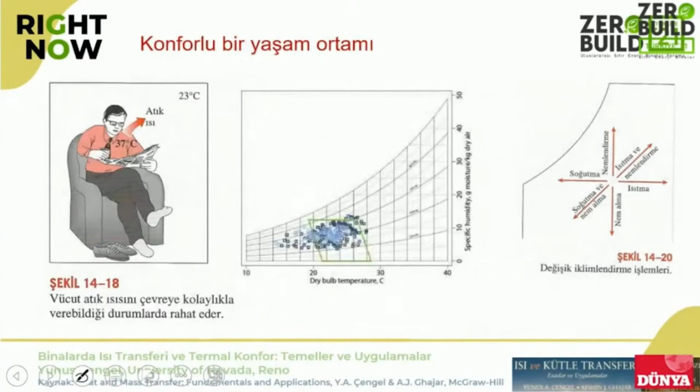The radiation impact and this comfort environment actually takes us to an average of around 20 degrees, and let's say the humidity is around this area, and this is the comfort zone, and we try to keep the interior temperature as such. I will finish here as we are running out of time.